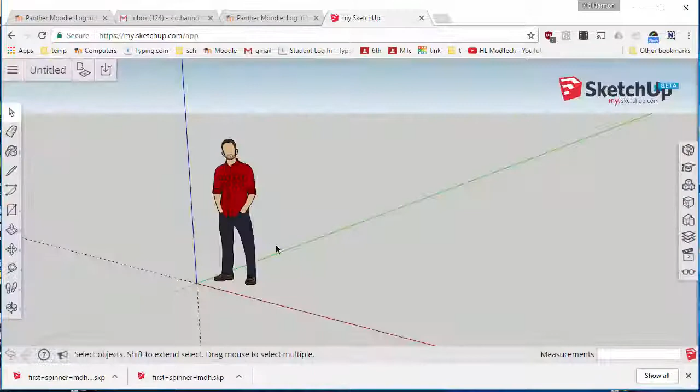First things first, I want to make sure that my SketchUp project is in millimeters. I'm not going to save the other model. Delete the dude, and I'm going to change the name. I'm going to get in the SketchUp folder, and I'm going to call it fan knob.

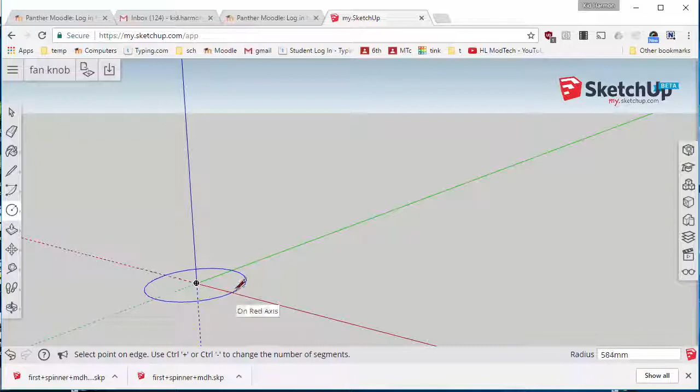The next step is I need to create the face. Now, my skills in SketchUp at creating rounded items aren't as good as they are in Tinkercad. But then also that's because Tinkercad has built-in tools to help me. So the radius, remember, was 28, or the diameter was 28, so I'm typing 14, and then I'm using the wicked cool zoom to extents tool.

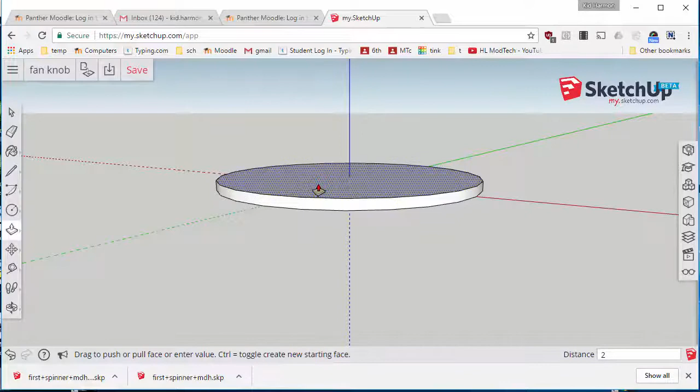I want to push this up 2 millimeters, so I'm going to do P for push pull. I'm going to raise it up 2 millimeters. The next step is I want to create that outside rim, and once again they have got wicked cool tools to make that happen. I want to grab the offset tool, which is on the push pull tool, offset. Now I want to make it 2 millimeters thick, so I'm going to hit 2,

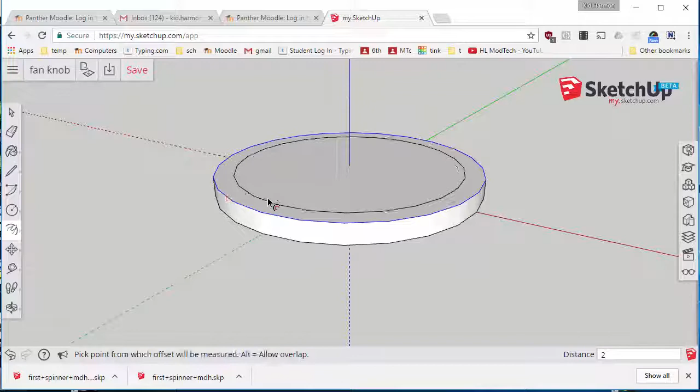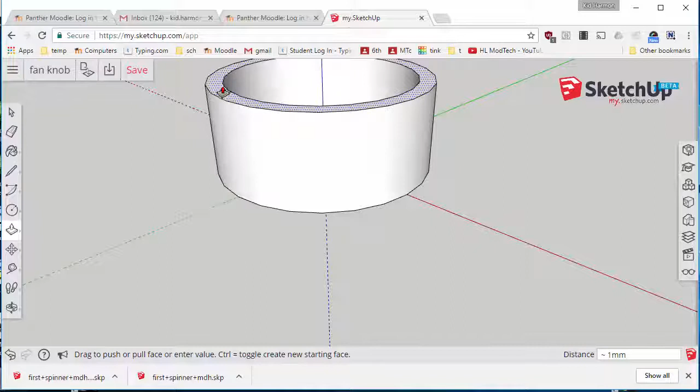and that gives me the wall of 2 millimeters, and then I'm going to push this up, and I'm going to make it 11 millimeters total, but that would be 9 more than it was. So when I press 9 and press enter, that'll be a total of 11, and I think I want to go 0.5, I said. So I'm going to go 0.5 more. Notice I always start it moving but then let go, so I'm not holding the mouse button, and then I can adjust and move where I want to.

I'm going to use another cool trick. I'm going to infer to create the center of the next piece. So I'm clicking the circle tool. I'm going to the edge, and then that infers that I want to go to the center, and I want to create a 10 millimeter center post, and I'm going to type 5 because they ask for the radius.

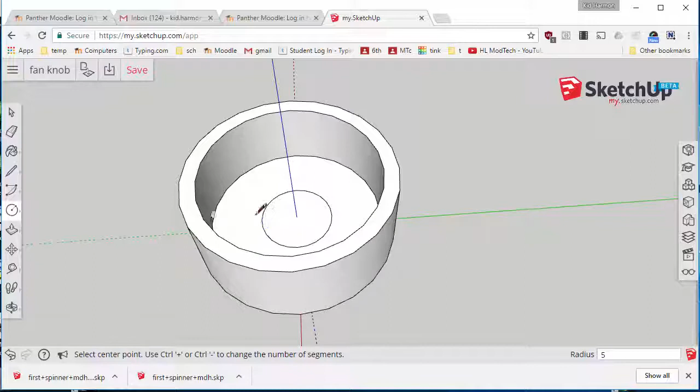I'm going to push pull that little fella up, and remember he goes a total of 15, so I am going to go 13 because I already went 2 millimeters. This one I was able to just click and go to. But usually I type it. That was just dumb luck.

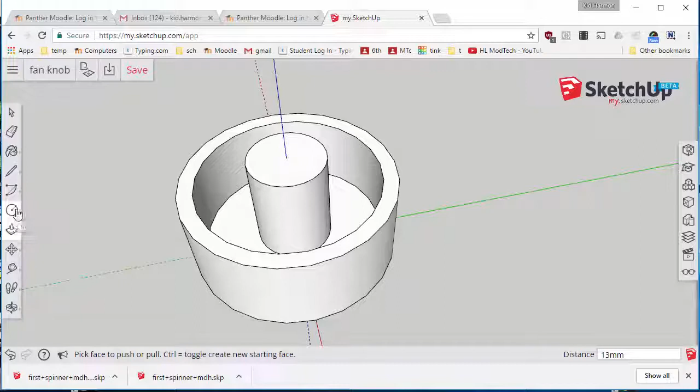And now I'm going to push the hole down in. I'm going to go back to that circle tool. I'm going to go to this edge, which lets me go to the center. Remember, this needed to be 6, but I wanted 6.3, so I'm going to do about 3.15 for my radius. And then I'm going to push pull that 13 down. And if I look inside, now I've got a nice flat shape.

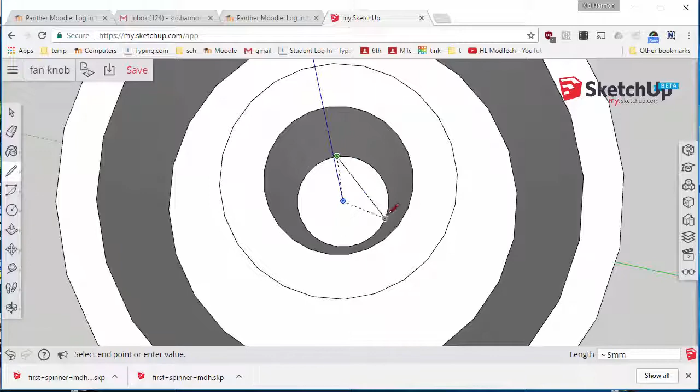Now remember, we had the 1 millimeter that we wanted to lift all the way up. I'm just making this a line across. Now remember, we wanted a flat piece, so what I'm doing is I'm just connecting a line across, and then I'm going to push pull that face, so I'm getting the dots on the correct face.

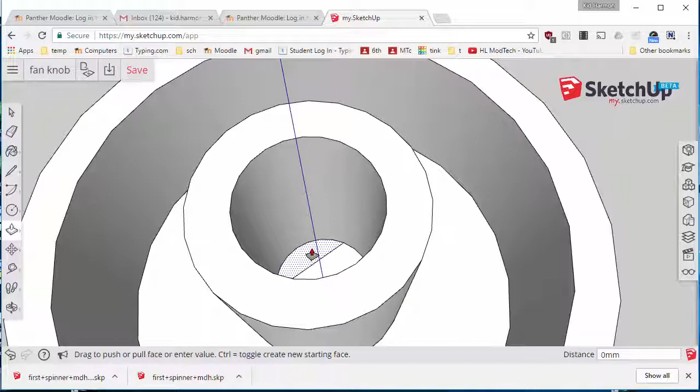And then I'm going to even be a little fancier. In the other one, in the real one, it only went partially up. I'm actually going to make mine look like that. So at this point, I have quickly created my fan knob. You can see both techniques are really slick.

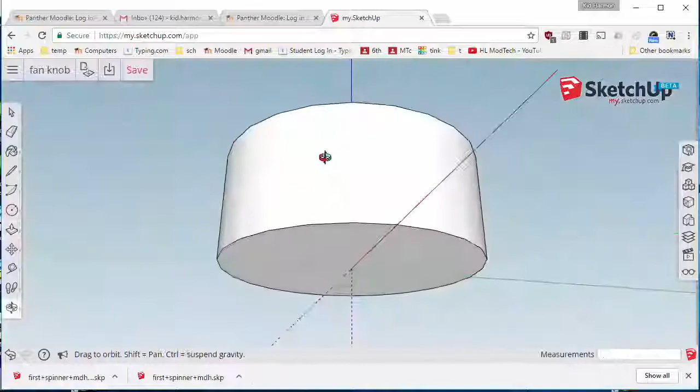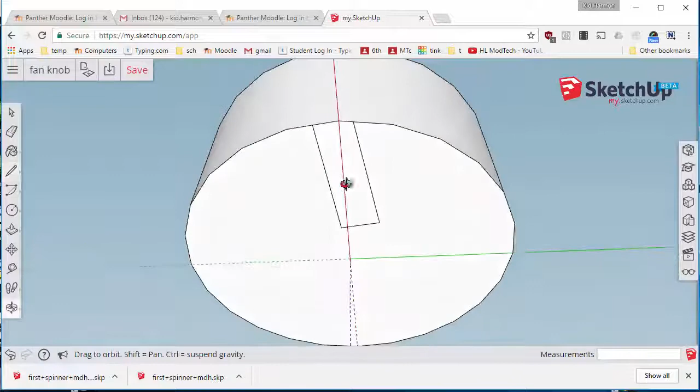The one issue with doing it here is I don't have a way to really easily cut out that mark that was on this side, but watch this trick. If I draw a line, come out, go 90 degrees, and then come back, and this isn't going to be perfect, but now if I push pull that in, and I'm going to go 0.5 millimeters, it does give pretty much the exact same thing.

So there we go. I'm going to save that, and then I cannot export these to STL right now. I need to instead download the model to my computer, open it in the real SketchUp, and at that point I can set it up for printing, and we can see which one prints better.